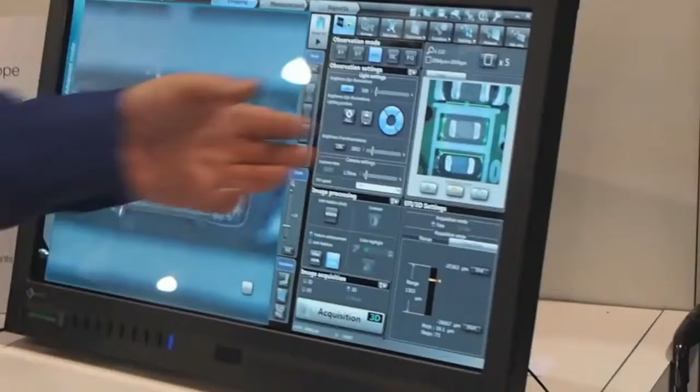So here we're looking at a PCB board. We have a very quick map image, so as we zoom out on our sample, we can see the larger area and we can see specifically where we are on the sample.

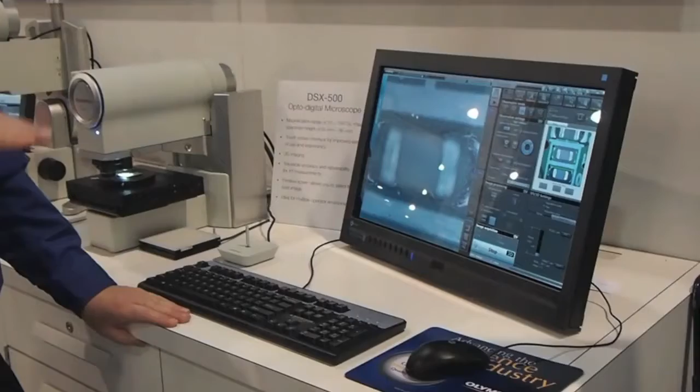This is a 3D microscope, so we could quickly take a scan of this image in 3D. What the microscope is doing is going through Z-height movements, and it's taking images at different heights.

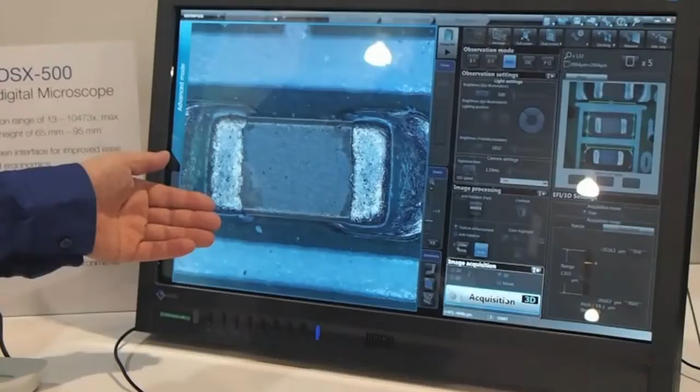So quickly what we see is an all-in-focus image where we're seeing both the background and the top of that resistor component on the board, all in focus. We can look at that image also in 3D.

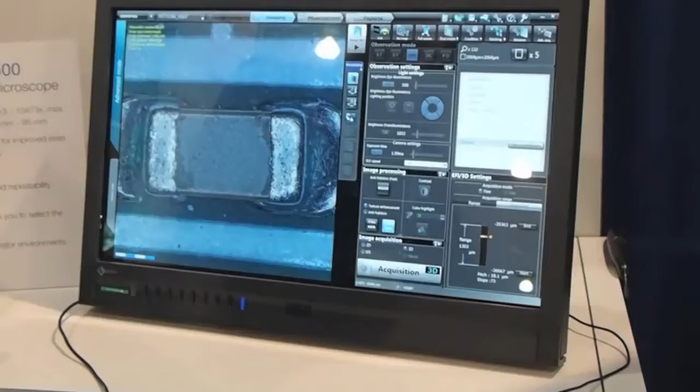And quickly here, this is a little exaggerated, but we're seeing that height data off the board, so we really get a feeling for that height.

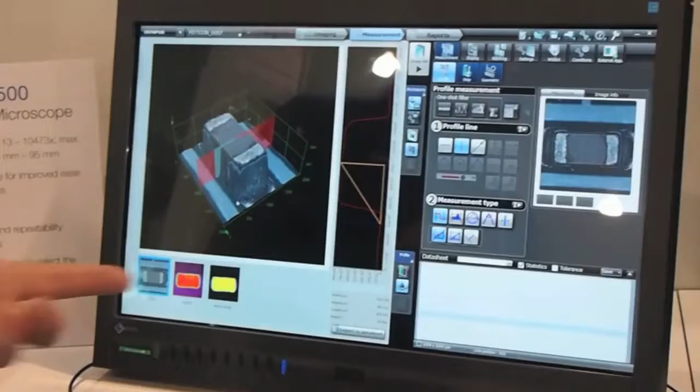When we jump over to our measurement phase with this same image, here we have the opportunity again. We're looking at that sample in 3D, and we're doing measurements in this mode across a profile line. So we draw a line across the specimen so we know where we're taking that measurement. We can move this to any point on the sample, to get a different feel, to do measurements in different points or locations as we need to.

We can see here on the histogram that we're measuring from the top of the sample to a height down on the board. And we can see our height measurement, in this case it's 778 microns.

We could also simply go from edge to edge of our sample and very quickly look at the width, 750 microns of the sample.

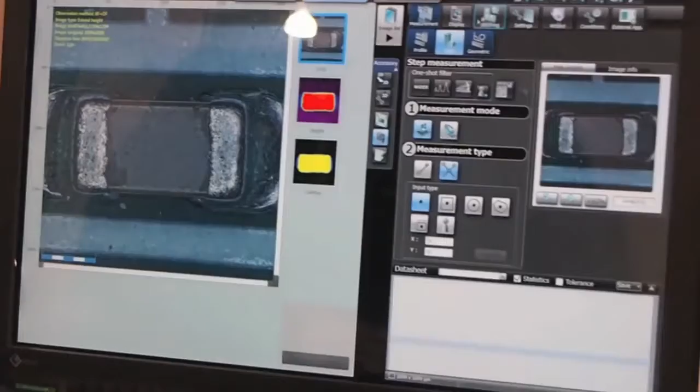Step height is another quick measurement that can be done. Here what we could do is average the height of the component to the height of the board. So I can pick a region on the board and get an average height here and compare that to an average height on the component.

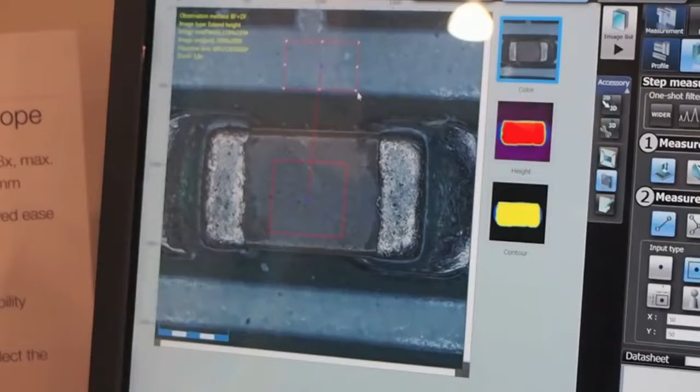So this way we're not measuring just one point, but we're averaging both areas to come up with a height, an overall height between the board height and the top of that resistor.

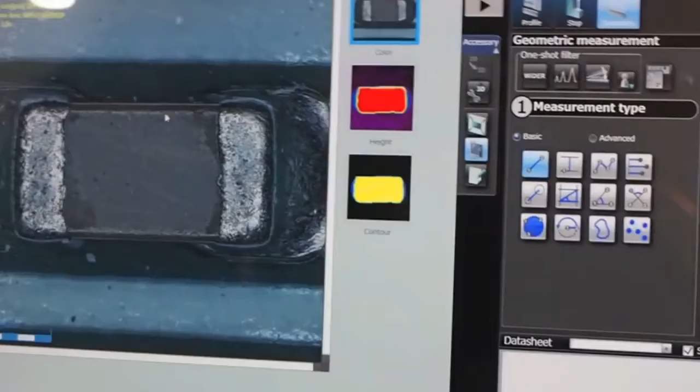Geometric measurements are also available on the sample, and these are very simple point-to-point measurements. We can do a parallel line to help us make sure that we have it straight across that image.

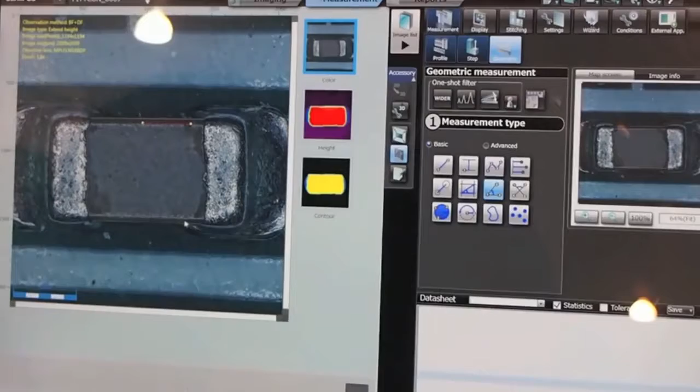We have opportunities to do angles, and here we're getting an angle measurement of that sample.

All of this data that we've collected, we can export over to a spreadsheet. In our report phase, we can quickly see the measurement that was taken. We can see the data from that measurement, and we can alter that data if we want.

So if we prefer to look at the 3D view of that sample, we can simply change it and show a different view of that sample to put together a quick report. With comment fields and templates, we can customize this report to match your needs.